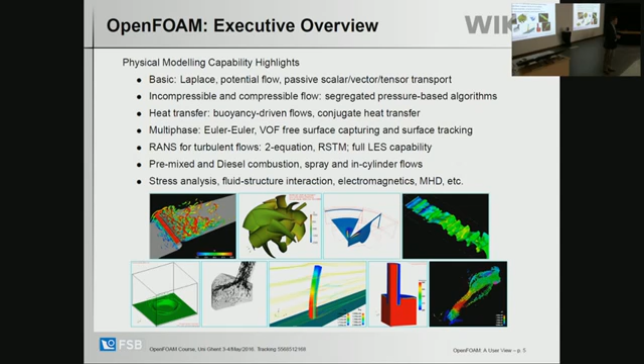Okay? The first step that you need to know is how to run the stuff that you already have. Okay, so here's a little overview of how the system operates. So we have the components, foundation libraries.

Those are basic things like what is a vector, what is a tensor, how do I do a dot product of two vectors, time database which says my simulation will start at time 0, finish at time n, and will progress in time steps. I will have the mesh, which is the discretized form of my computational domain, and then the whole discretization, in this case second order finite volume.

Then we have the physical modeling libraries to help you with things like, for my biscuits, what are the properties of water vapor as a function of pressure and temperature. Of course I can do the same with liquid water plus the full interface for combustion. And then we have all the other models as well, like viscosity models, turbulence models, chemical reaction interface through ChemKin, interface to material properties through JANAF tables, etc.

At this level it really helps that OpenFOAM is not such a new thing. The earliest pieces of software were written in 1992, which is almost 25 years ago, so all of these interfaces have been validated and people have been using it for a long time.

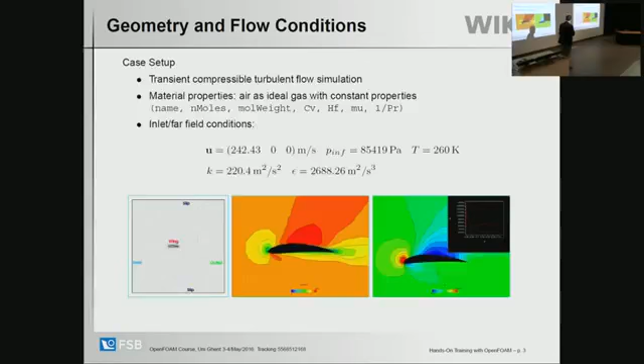Around an airfoil, and we will use the inlet velocity of 242 meters per second, P infinity, T infinity, etc. And in order to do that, we have to go through the organization of the files.

Okay, so as I said, we are going to have the system directory where the controls are, the constant directory with various properties and the mesh, and a bunch of time directories. Each of the files has got a little description of the header.

Are you guys done? You done? Okay, so each of the files will have a little description of the header telling the system that this is a FOAM file. The format looks like this, and later on I will describe this to you as a dictionary.

A dictionary is the main input-output system of OpenFOAM. The idea is that everything in a dictionary has got a keyword and the value, for example 2.0, ending with a semicolon. So the way you search the dictionary is you look for the keyword and get everything from here to the semicolon to interpret in your way.

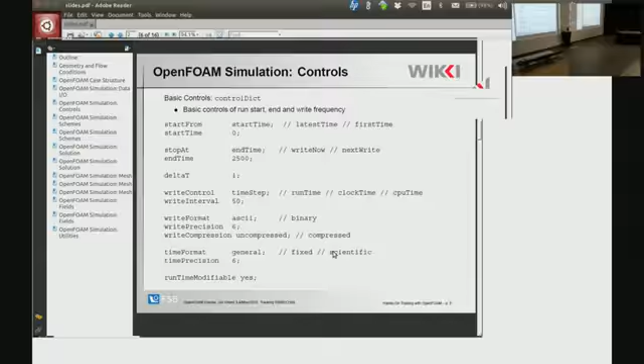My main dictionary is something called the control dictionary. At the top of the control dictionary, there will be a little entry saying foam file that allows me to look at the dictionary. And then I'm going to have a bunch of keyword value pairs. For C++ programmers, the comment style in this dictionary is the same as the comment style for the C++ source code. Meaning, everything that starts with /* and ends with */ is a comment, and everything that starts with // ignores the rest of the line. Take a look at it here.

Start from, start time is 0, stop at, end time is 2,500, delta t is 1. What does that mean? It means that the solver will count time steps 1, 2, 3, 4, 5 and stop when it reaches 2,500. Now there is a slight misnomer here, because if I'm running a steady state simulation, then delta t doesn't make sense. But as I already told you, the solver doesn't know what physics you're doing, so we have to choose one way of dealing with it.

The second part that I have here is write control. What does that mean? Do you remember the time directories, 50, 100, 200, etc., where the solver dumps the data for me to look at them? Well, how often do I want to have that? I want it to output every 50 time steps.

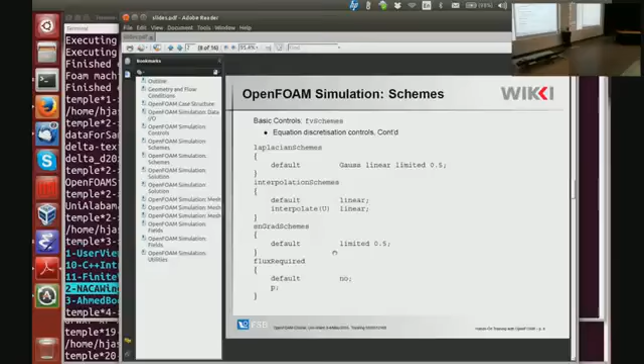Okay. The second part of this dictionary looks like this. Laplacian schemes, interpolation schemes, snGrad schemes, fluxRequired. And some of them can have a default entry and then specific overrides for some of the factors. Okay? We will see that at least 20 more times during the course, so I'll let it go for a little bit.

The next part of the story that I have is the fvSolution file. Okay? Again, it has a series of dictionaries. How do you recognize them? Solvers, open curly bracket, close curly bracket, is a dictionary of dictionaries. Okay? The first dictionary has got a keyword p, open curly bracket, close curly bracket. The second dictionary has keyword U, open curly bracket, close curly bracket. Can you guess what this is?

Well, these are the linear equation solver settings for a variable called U, which is probably velocity, right? Peter disagrees because in his case it is displacement increment, but who cares? That's because Peter is using a different solver. Okay? What are the parameters? Well, the first parameter is which solver do I want to use, and that one is called BiCG with DILU preconditioning, and it's got an absolute tolerance and a relative tolerance, or maybe many more parameters.

Okay, two wrinkles. Number one, what solvers are available for you? Anyone? Come on, I told you a second ago. Stick in a banana, and you will find out what choices are available.

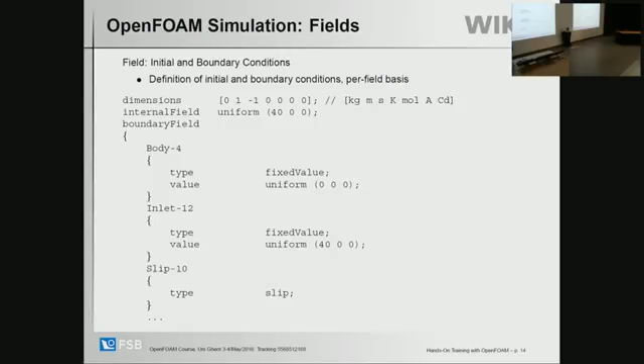But when the solver writes out the results, then the value of the field will not be uniform, right? So what I will have is it will say something like non-uniform list of vector, open round bracket, and then the number of vectors, which is equal to the number of cells in the mesh. For the boundary conditions which are not uniform, I may have the same, but whenever possible, I will try and avoid writing things like, for example, on a zero gradient boundary, because I can easily figure it out from the other data. Okay, so my initial and boundary conditions will be defined in zero directory, and the consistency of those boundary conditions depends on the solver.

So here I have to make you work harder than you work with, for example, Fluent, and you need to know that the inlet means a fixed value of velocity, fixed value of turbulence kinetic energy, dissipation, temperature, blah, blah, blah, but, for example, zero gradient on the pressure. Yes, but if your solver is compressible and the flow is supersonic, then you will fix the pressure at the inlet. Also, you have about 5 different ways of specifying the turbulence kinetic energy. It can be a given value, it can be a percentage, you can give dissipation in terms of the length scale, blah, blah, blah, which means that these conditions can get more and more complex depending on how luxurious you want your life to be.

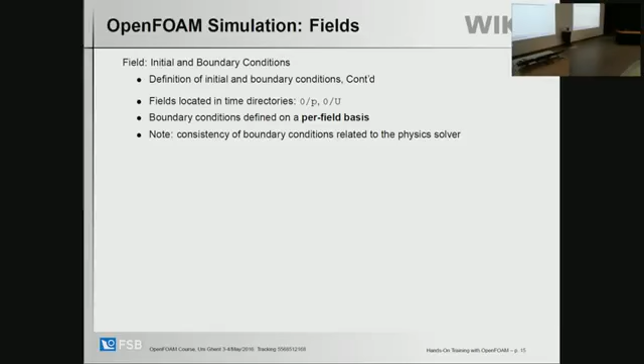For example, if I have an inlet patch which is not aligned with x, y, or z, I may wish to specify the inlet velocity as something like mass flow rate. Which means the mass flow rate is 40 liters per second. Now you go and figure out the area of the patch and the direction and specify the fixed value which corresponds to my mass flow rate. So those are the kinds of things that foam can do.

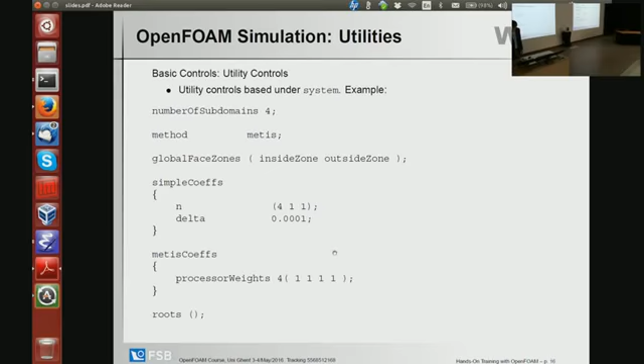Unfortunately, 10:30. Let's have coffee first. Any questions so far? Are you still alive? Good. I promise it will get more interesting. See you in half an hour.